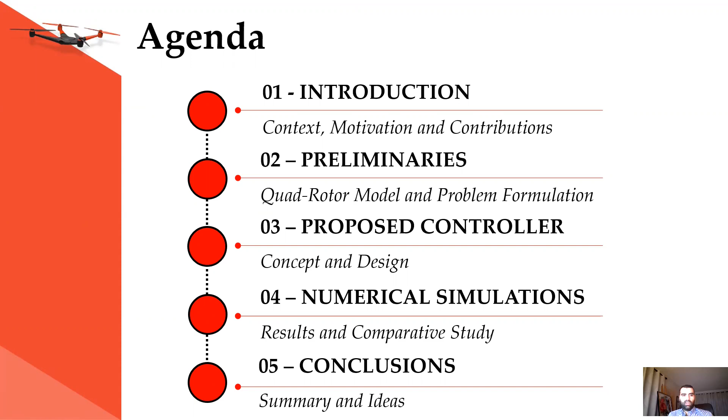Nowadays, the world is experiencing a crazy technological advance with the arrival of the fourth industrial revolution. This revolution will fundamentally change the way we live, work, and communicate with each other. However, to make this revolution a success, several technical challenges must be addressed, including the control of uncertain cyber-physical systems.

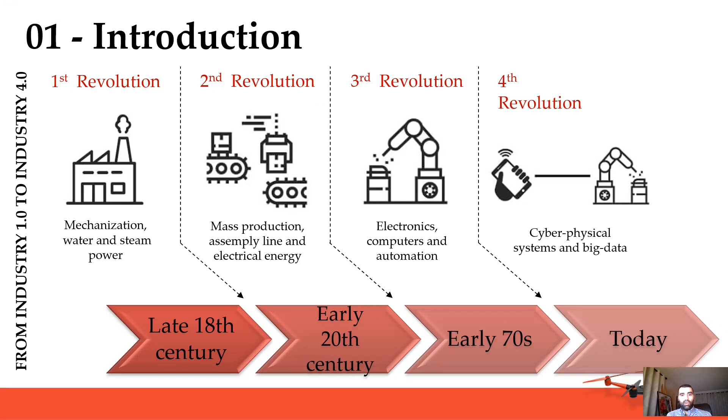So the goal of our work is to design a robust nonlinear controller able to satisfy good performance while rejecting the effect of uncertainties and disturbances for this kind of system. Designing controllers without taking into account the effect of uncertainties may cause undesirable performance or even instability. So in this work, we consider quadrotor UAVs as an example of cyber-physical systems.

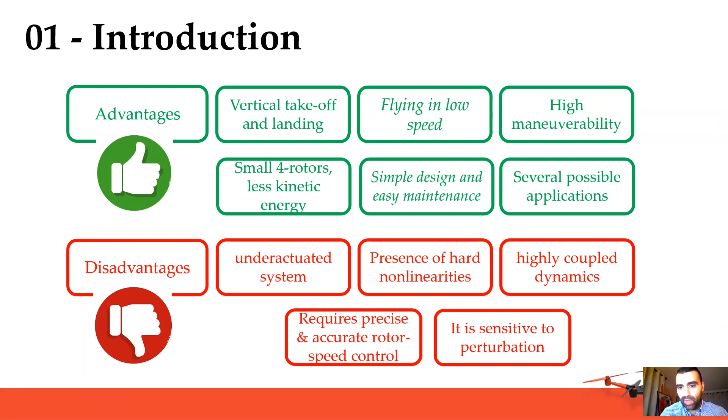Nowadays, there has been increased interest in the development of autonomous flying quadrotors because of their good features. UAVs are present in several applications, such as safety missions, military missions, border surveillance, delivery, inspection, agriculture, and others. For UAVs, the control objective is to ensure always a safe and accurate flight.

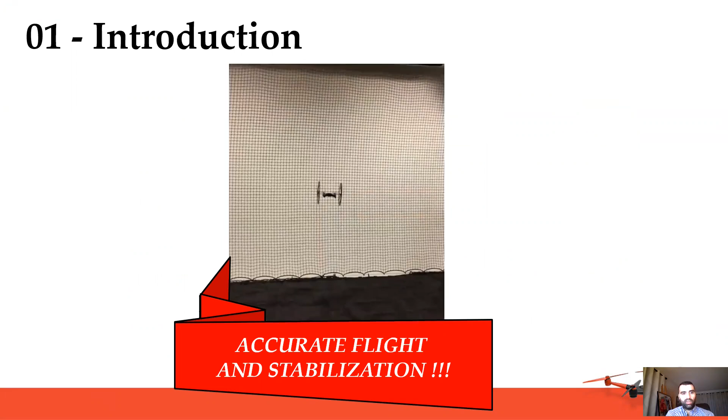So for example, in this video, the objective was simple: we would like to draw a circle at 2 meters altitude.

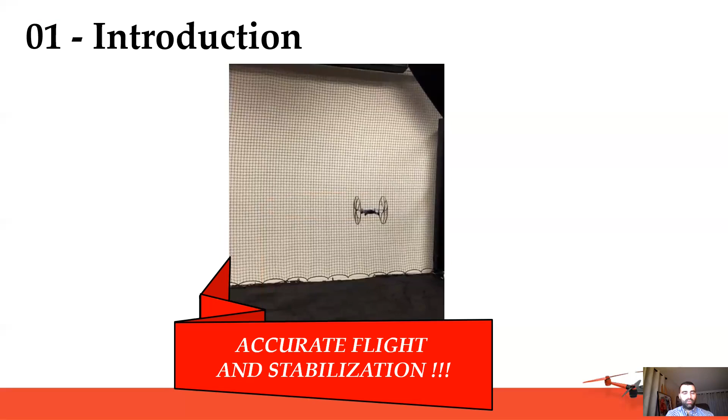To do so, several nonlinear methods have been proposed for nonlinear systems, especially for the class of second-order electromechanical systems. We can cite feedback linearization, used to obtain an equivalent linear system so that linear methods can be applied. We can also talk about backstepping, a recursive method based on Lyapunov theory, and sliding mode control, a variable structure controller that uses discontinuous switching action to ensure robustness against uncertainties.

We can also cite other famous methods such as high-order sliding mode control, especially second-order sliding mode for second-order nonlinear systems, as is the case for quadrotors. We can also talk about model predictive control and other intelligent methods such as artificial neural network-based control.

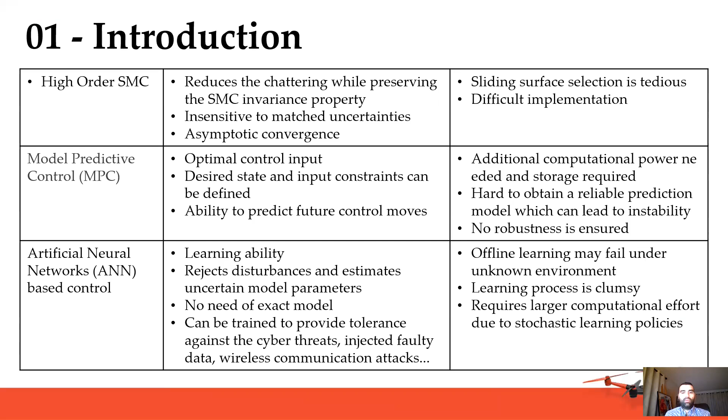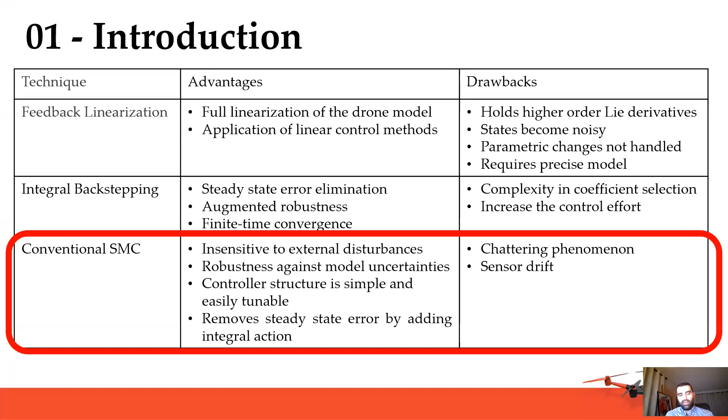So if we put all these methods in a funnel, the method that will be found first on the other side is sliding mode control, due to its good features while having few drawbacks. In our work, to improve sliding mode control, even though there are many works that try to deal with its drawbacks, we propose an exponential power reaching law sliding mode control with model-based sliding surfaces, giving us 3 new features.

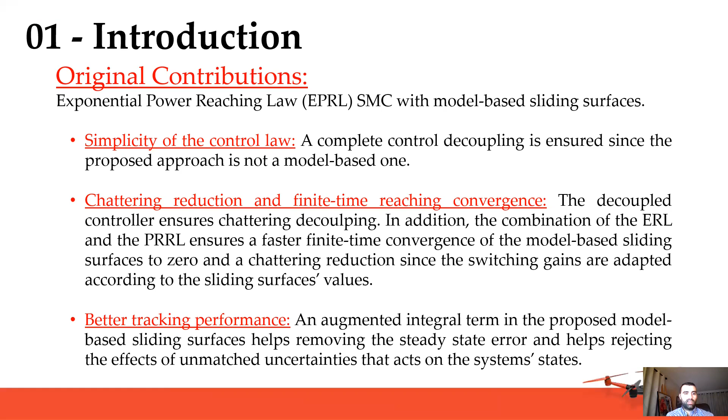In addition, the combination of exponential reaching law, power reaching law, and linear correction term will ensure a faster finite time convergence of the model-based sliding surfaces to zero, and will also reduce chattering since the switching gains are adapted according to the sliding surface value. It will also allow better tracking performance, since we have an augmented integral term in the proposed sliding surfaces that helps remove the steady state error and reject unmatched uncertainties that act directly on the system state.

The quadrotor UAV motion can be defined by 6 degrees of freedom, 3 of which are the attitude composed of roll, pitch, and yaw angles, and also the position X and Y and the altitude Z.

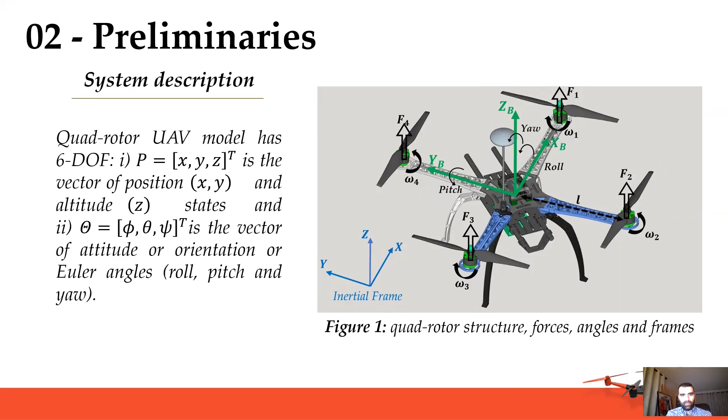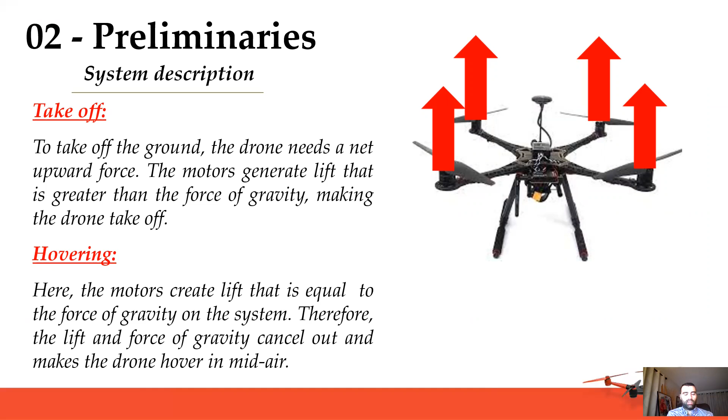The quadrotor UAV moves in 4 directions. We have the vertical one, to take off or for hovering. To take off the ground, the drone needs a net upward force, so the motors generate lift greater than the force of gravity, making the drone take off. For hovering, the motors create lift equal to the force of gravity on the system, so they cancel each other and the drone can still hover.

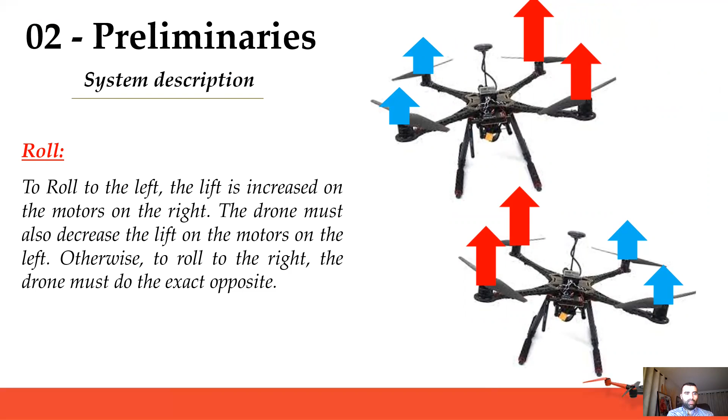There is also movement according to the roll direction. To roll to the left, the lift is increased on the motors on the right, and the drone must also decrease the lift on the motors on the left. The drone must do exactly the opposite to roll to the right.

We also have the pitch movement. To pitch forward, for example, the power applied to the rear motors is increased while the power applied to the front motors is decreased. The exact opposite is done to make the drone pitch backward.

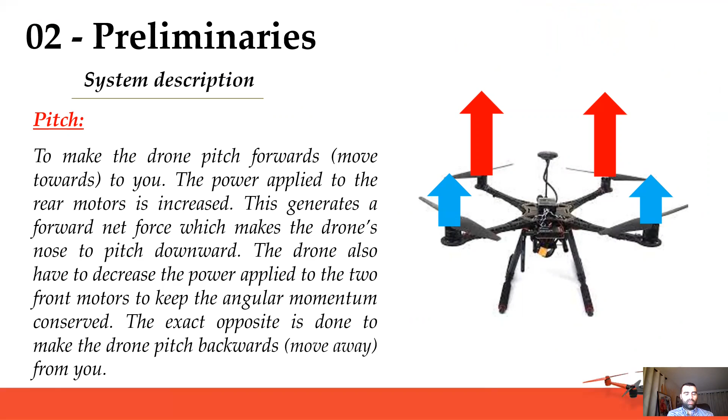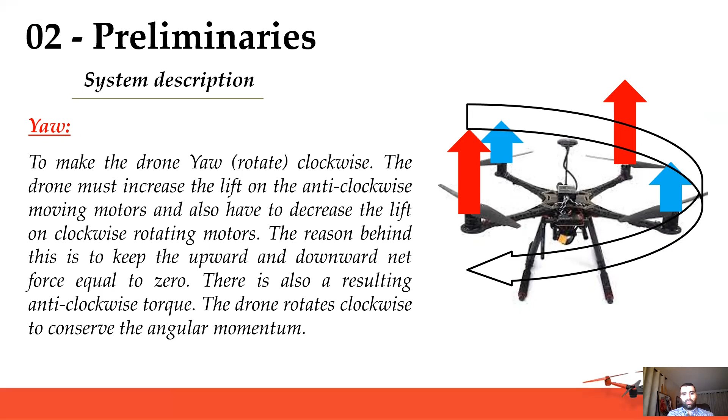And finally, the yaw movement. For example, if we take rotation in the clockwise direction, the drone must increase the lift on the anti-clockwise moving motors and decrease the lift on the clockwise rotating motors. The reason behind this is to keep the upward and downward net force equal to zero. There is also a resulting anti-clockwise torque, so the drone rotates clockwise to conserve angular momentum.

The quadrotor is a complex mechanical system. It undergoes many internal and external physical effects in the aerodynamic and mechanical domains. The model of the quadrotor should consider all important forces and moments, including the gyroscopic effects.

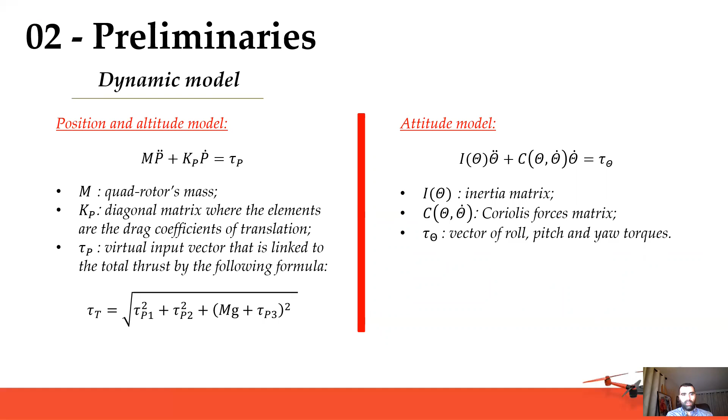The dynamic model of a quadrotor UAV is usually obtained by applying Newton's second law on the forces and torques which the quadrotor is subject to. The typical quadrotor model is given by the position, altitude, and attitude models described in this slide.

Now let us state the control objective before designing the controller. Let P minus PD be the desired position and altitude error, and let theta minus theta desired be the attitude error vector. If we assume that the roll and pitch angles are different from minus or plus half pi, in order to avoid all singular configurations, the control objective is to design two cascade robust nonlinear controllers using the proposed approach to ensure the convergence of both the position and attitude errors to zero.

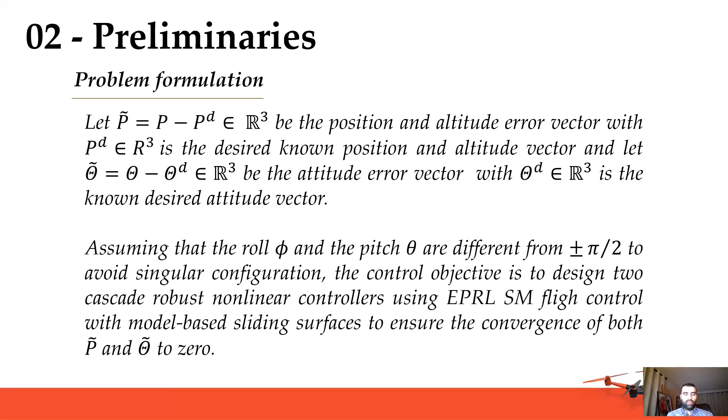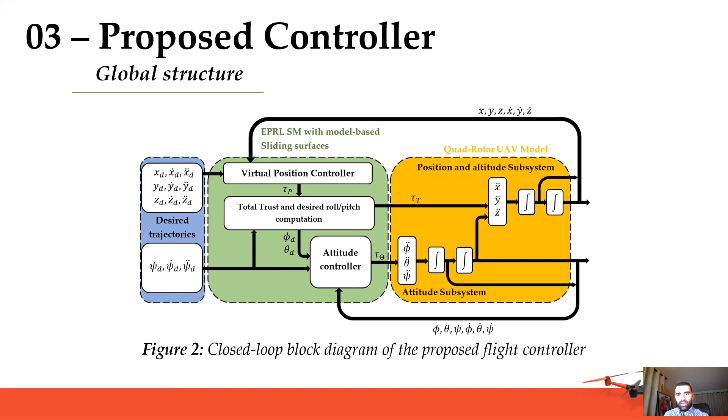The global structure is presented in the following block diagram, where the position is controlled in an outer loop and the Euler angles are controlled in the inner loop. In the next slides, we're going to see how these two loops are designed.

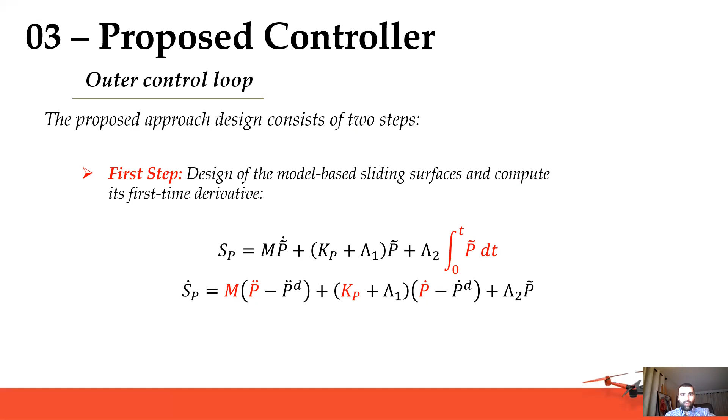For the outer loop, where we control the position, the proposed method consists of two steps. The first is to design the sliding surfaces based on the model and to compute its first time derivative. It can be seen that the derivative of the sliding surface is in terms of the model, which will simplify the expression of the control law.

The second step is to design the controller, where we compute the expression of the control law using the proposed exponential power reaching law. This proposed reaching law is a combination of the exponential reaching law, which allows adaptation of the control gains, and the power reaching law, which is used to reduce chattering and converge faster, along with a linear correction term that helps converge faster and improve accuracy.

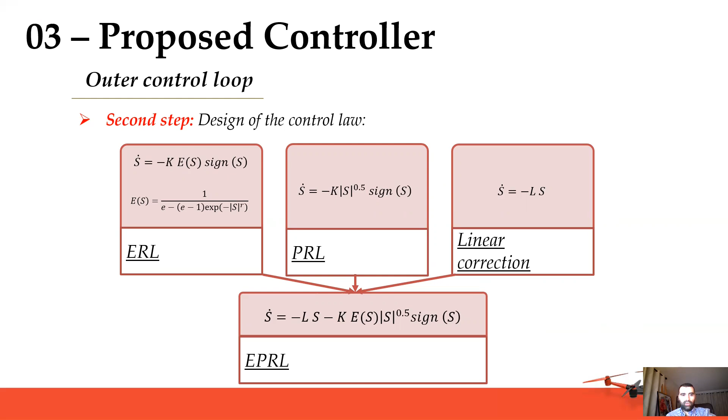A detailed design procedure can be found in our paper, and here we summarize the theoretical results. If we consider the position model of the quadrotor UAV system, the computed total force will ensure the convergence of the model-based sliding surface to zero in a finite time.

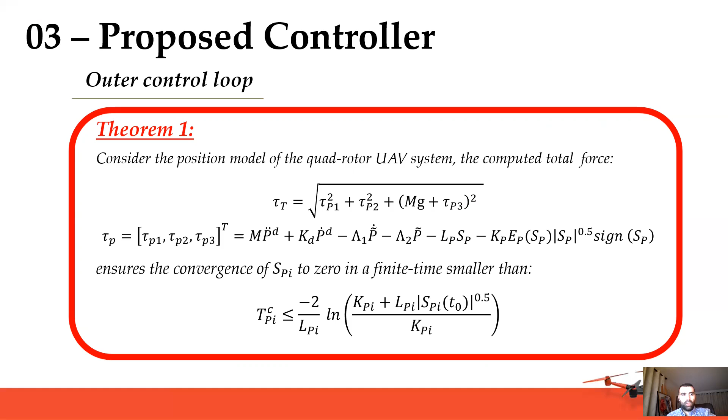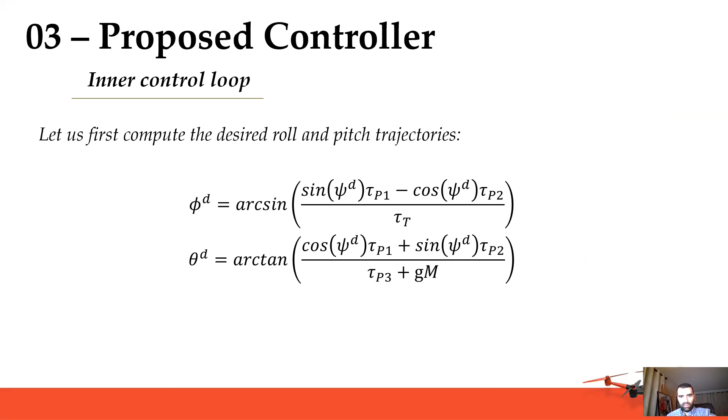For the inner control loop, we first compute the desired roll and pitch angle references using the computed position controllers. Then once again we design the model-based sliding surfaces and compute the first time derivative.

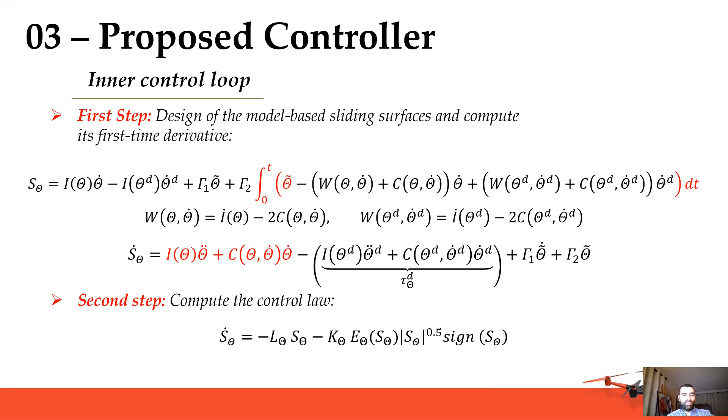Once again, we can see the model inside the derivative of the sliding surface. This is the sliding surface, while the second step is to compute the control law using the exponential power reaching law given in the equation below.

If we consider now the attitude model of the quadrotor system, the computed control input vector will ensure the convergence of the sliding surface to zero in a finite time also.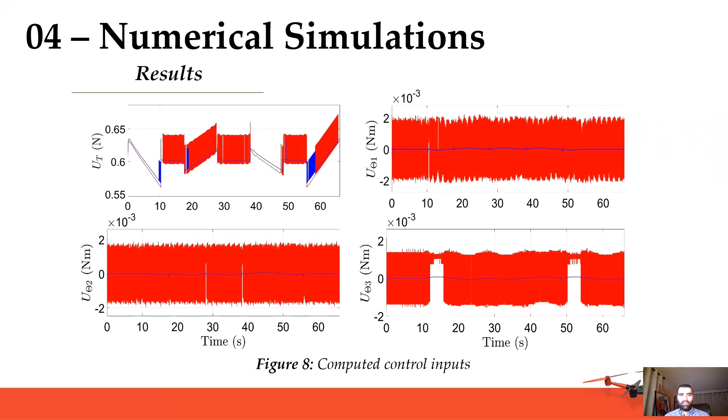We can see that the chattering has been reduced using the developed method, while it is still present, though with less amplitude, with the conventional sliding mode with model-based sliding surface.

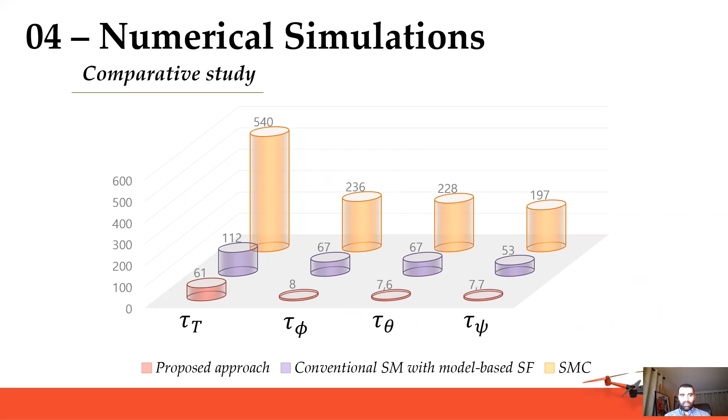Based on the total variation of the control criteria, we can also see there is a huge difference in control effort when comparing the proposed controller with the conventional sliding mode with model-based sliding surface, and also with the classical sliding mode control, where the chattering is really high, the control effort is high, and the coupled chattering effect is big. This shows that the proposed approach is way better than the others.

As a summary, this work proposes an exponential power reaching law sliding mode flight control with model-based switching surfaces for quadrotor UAV systems. We also present simulation results and a quantitative comparison of the enhanced method with the conventional sliding mode with model-based switching surfaces and the classical first-order sliding mode control.

Furthermore, in the future we will focus on the real-time implementation of our method on a real quadrotor system, and also on other second-order nonlinear systems, especially electromechanical systems.